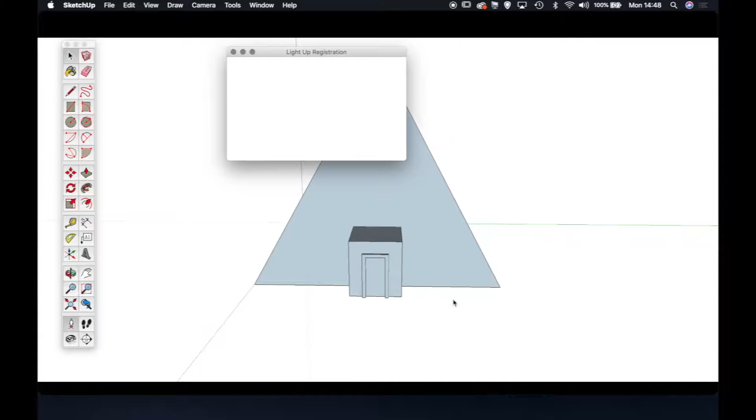The thing about millimeters is that it's a lot easier to deal with, because you don't need to convert anything to put it into a slicer, a software made specifically for 3D printing that slices objects and calculates each layer in millimeters to be very precise. So speaking the same language, especially in units, will save you a lot of time and is a lot more advisable.

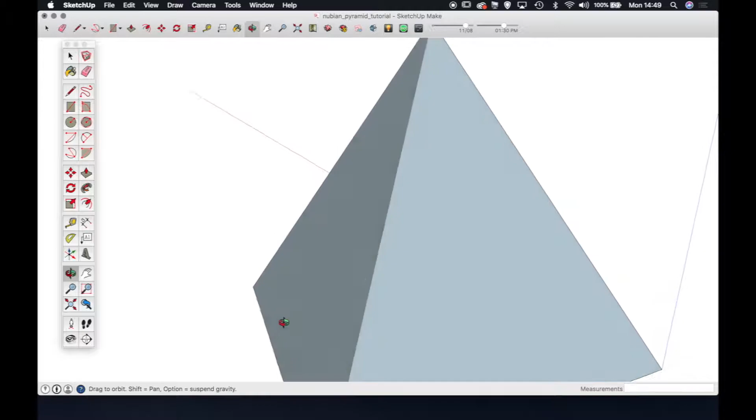Now let's concentrate on this, the end product. I know it's very simple, a really interesting pyramid. Oh, and there's a giant right outside.

We just need to get rid of her. Sorry, Mrs. Boop. So by doing that, I just selected it and pressed delete. That's all I did.

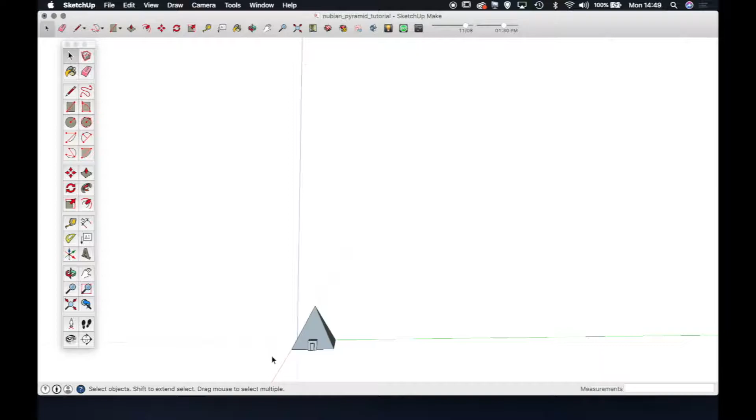Now we can use the H key, the camera, to go back to where we were, like that. And then we can use the letter O to orbit or rotate around our object. Now I am going to do something.

I'm going to go over here and replicate this pyramid from scratch.

Notice that as I'm making a square, I can go to the bottom right corner and specify exactly the size of my square. So let's do 40 by 40 millimeters. Let's leave it at that, and then press return or enter. Great.

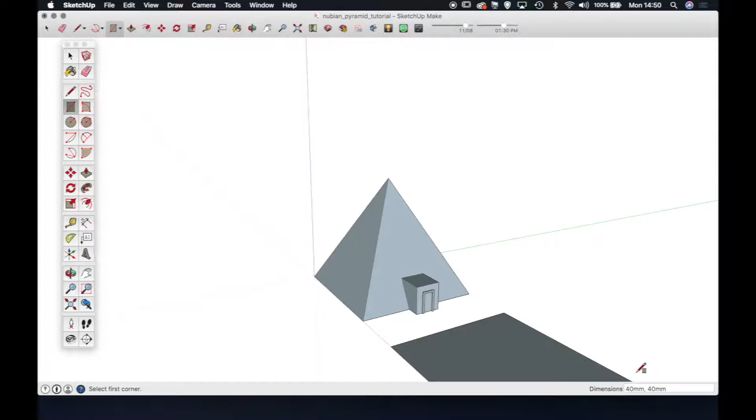Now let's press O and rotate around and see. Great, so this is a crucial step to making any sort of pyramidal structure.

Also something to really be careful with are these little pop-up messages that come up when you hit something important, like an endpoint. If they don't come up, you're in the wrong place. Make sure that, for example right now, the word endpoint is coming out of that little helper window that pops up when you hit there.

And then it kind of just clicks together. See, if it's right here and says 'on edge,' you're on the path, but it's not the point. We need to find the point, the endpoint, the corner. Then we're going to do another one from that endpoint to this endpoint. You see where this is going? It's about to turn into a pyramid, right?

Now just make sure that it's actually going to go the right direction when we pull this up. I make it blue, on the blue axis, right? This is very important because of the blue axis—and to get rid of this, you press escape. The blue axis is right here. It's the height of something.

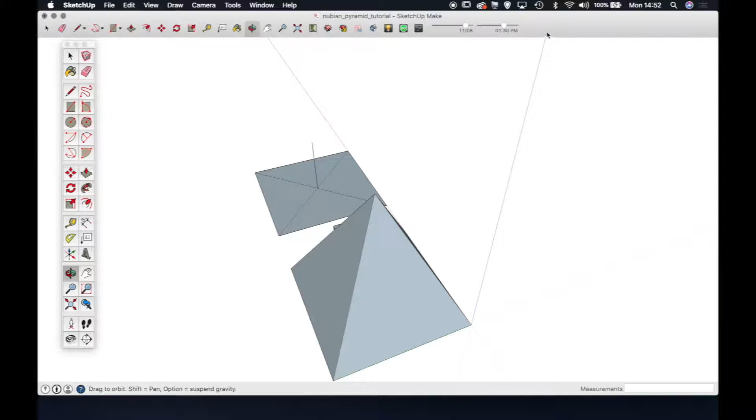Let me see, okay, see this line here? I don't know if you can see it as blue, but it's blue, and it controls the height of any object in here. The red is kind of like the X, and the green is kind of like the depth, like Z or something.

So now we use a really amazing tool, the move tool, or copy/move tool. Pay attention that you're not moving or copying any surface—you're going straight for the point, the endpoint, where the two lines intersect. And then there you go.

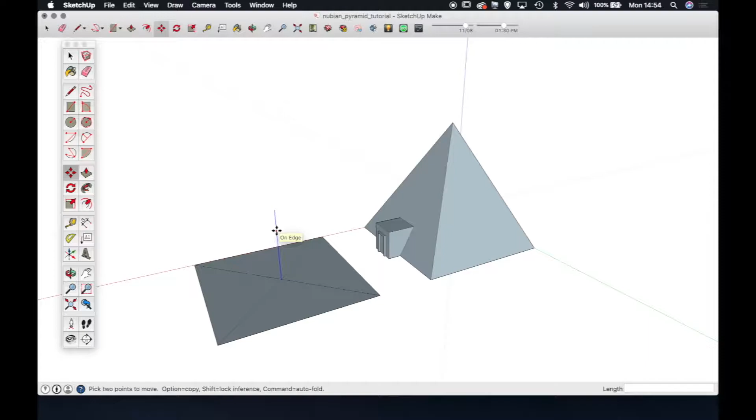Let's go back and do that again. So, endpoint—now that we have this guide that is perfectly parallel to the blue axis, you can go up and see, but here we're going to move it, right? It gets distorted, so that doesn't work very well, but you should be able to see at all times that you're doing this. It's actually not hard.

The program kind of snaps it into place, and then you can use the dotted blue line coming from the bottom, from the middle point where those two lines were converging, going straight up parallel to the blue axis. You can also determine the length of that extrusion. If I put 40, it's going to be more like—this is a good ratio for a Nubian pyramid.

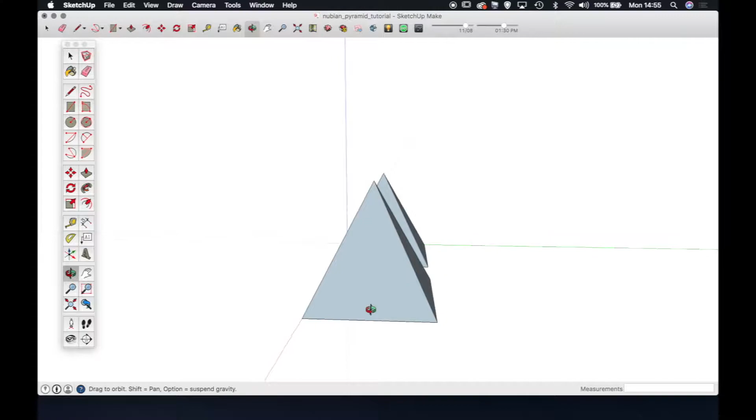All right, so now we're going to do probably the most labor-intensive part. First we got to find the middle point in here. Oh, it found it, right? So quick.

And then we're going to go up about, this line needs to be purple. Why is it purple? Because it's on the surface, so it's not parallel to any of the axes, but it is in fact parallel to the surface that it's touching. Now we're going to go over here 3 millimeters from the point, and then down, and then we get that purple line again, down 7.2.

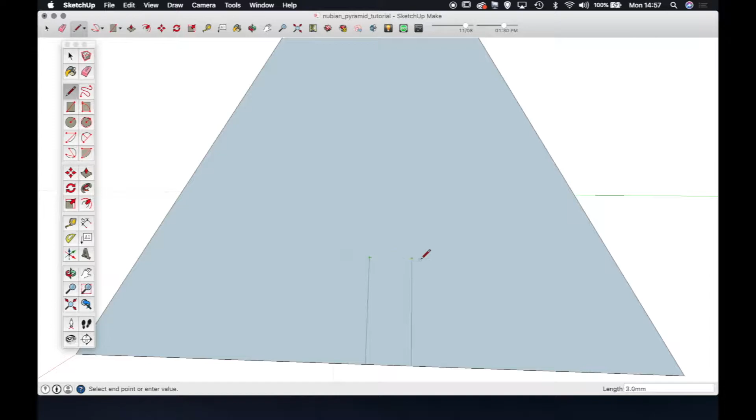So we did, what is this, 3? Let's go 3 again here. We're making this door from the middle point. This is going to be our door. We're going to erase this eventually. In fact, we can do it now. That path, boom.

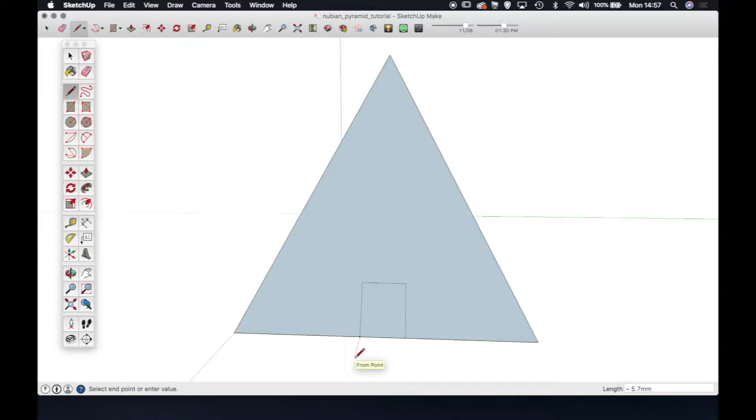Now, we need to make sure that this line is red, because it needs to be parallel to the red axis. That's very important. Let's get the O here, orbit, to get a better place to see things. Great, and then the hand with an H allows us to really see what's going on.

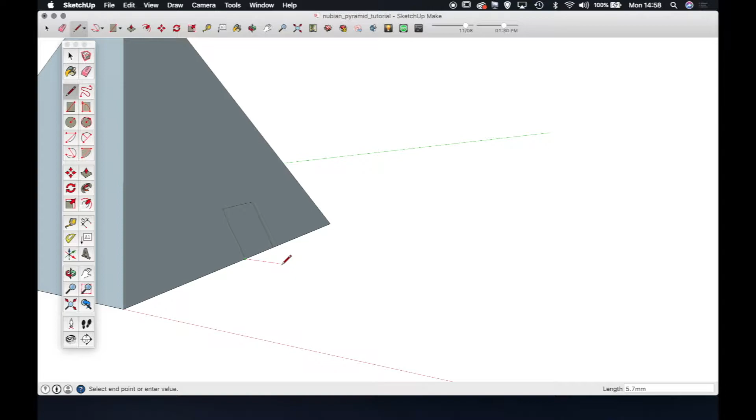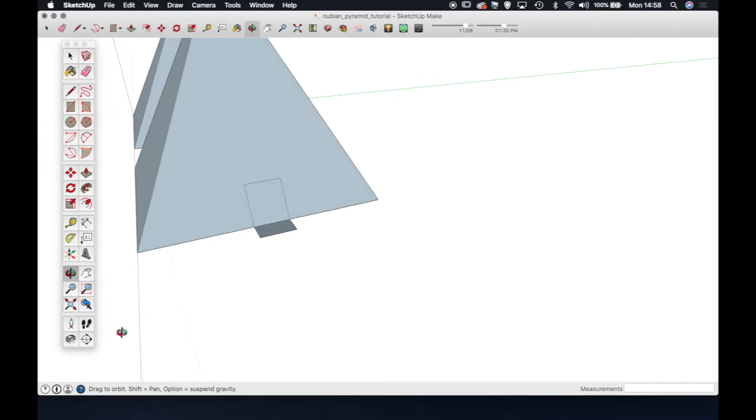All right, so I have the red axis here in frame, and I get the pencil tool, the line tool, and I'm going to extrude this to about 6 millimeters. The cool thing is that it kind of snaps there, which is amazing because that is straight parallel to this point. In that way, SketchUp is a really amazing program. I mean, it might look a little raw, but it really is an amazing program.

So if this happens, see, it's really gathering all the information from this point, which is not ideal, but we know that that point is parallel to the point that we want to merge with. And in fact, we can go to the end point and back, and it will basically remind you, look, you're at the right height. The program thinks that you're at the right height. Just enjoy its precision. And then boom.

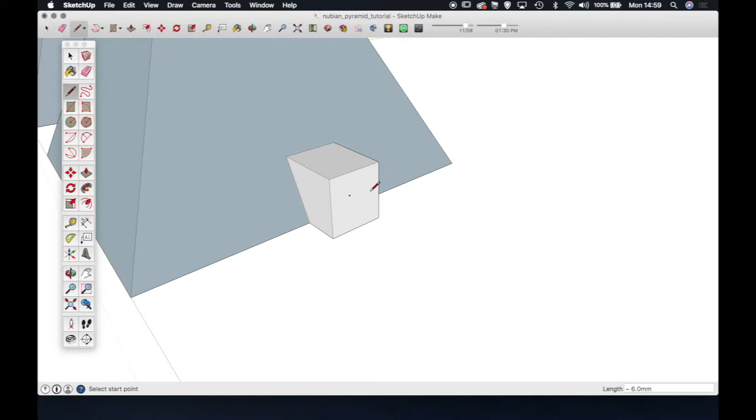And then this was red, which means it was exactly parallel to the red axis. And the same thing here, this one needs to be parallel to the blue axis, so the line is going to be blue. And then that line is going to be red again. And this one, who can figure out, is green. Yeah, green. And when we finish that line right there, we are going to see an enclosure of the entire atrium of the pyramid.

So now we're going to do the same thing because we're making a door here. We're going to use the same midpoint, the same method that we used to make the doorway into the pyramid. Now we're going to make a door outside the doorway. So let's go here.

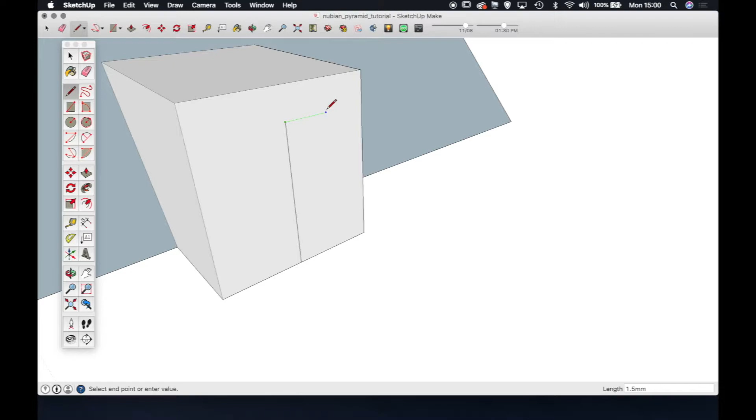Let's make this. This needs to be a blue line, not a dotted line, on the face. See, on the face, because the face is exactly parallel to the y-axis. And then we're going to do this. Now, let's be conservative about this, 1.5.

Great. It might look distorted, but it's actually not, right? Then, what is this again? 1.5, and then we go down here. Great. Now, let's delete this. It's not French doors we want, we want nice Nubian doors.

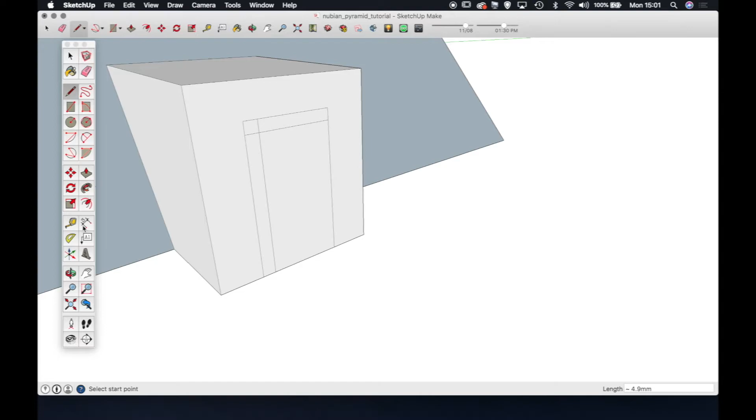And now we can go and stylize a little bit what's happening here. Okay, that was parallel. Let's make that square there. Once we make that square, we know pretty much. Now I'm going to change the angle a little bit because I want to match that.

And that means I have to go, what? 0.5 from the end. Okay, so escape, 0.5. And I'm finding all these numbers in the bottom right corner, length 0.5 millimeters. Now that I have a point there, boom, just make sure the line is blue by the time you get it all the way down there and finish the line.

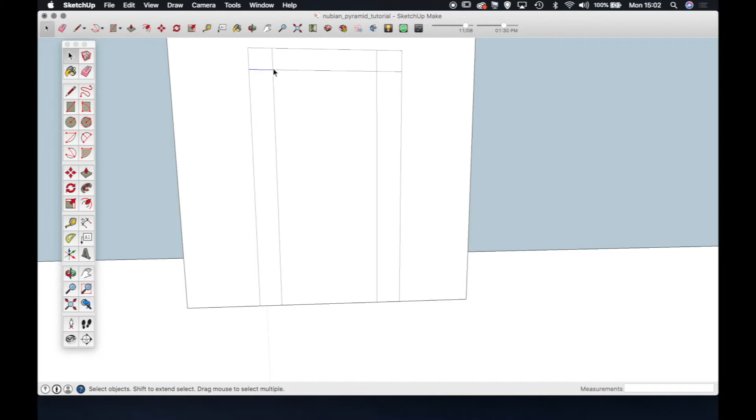So now, because these lines were intersected by other lines, they automatically become lines that separate faces, right? So now I'm just going to delete this because we don't need this anymore. It was just to make sure it was square and in the center. And now because we deleted all of those partitions, we now have a solid shape here around the door that we can use to make the frame, the door frame.

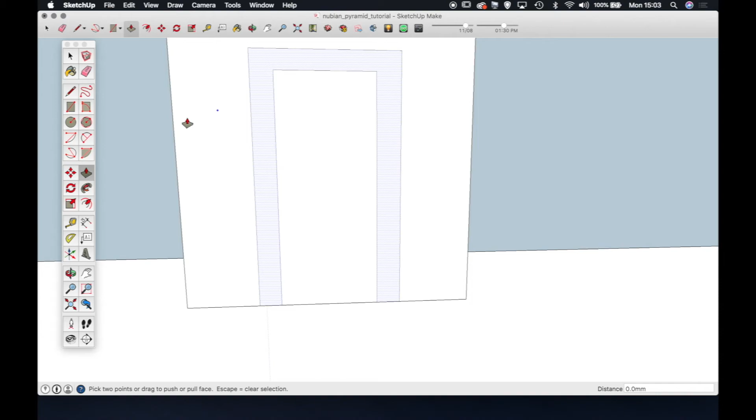And this tool is amazing, it's the push-pull tool. You can press P, and you get it. And now we need a different angle, so let's go like this, because we're talking about pushing or pulling this out. I think this is good. Yep, there you go. You have your Nubian pyramid.

Now that you can make a pyramid, basically, and a doorway on SketchUp, you can make a lot more stuff.